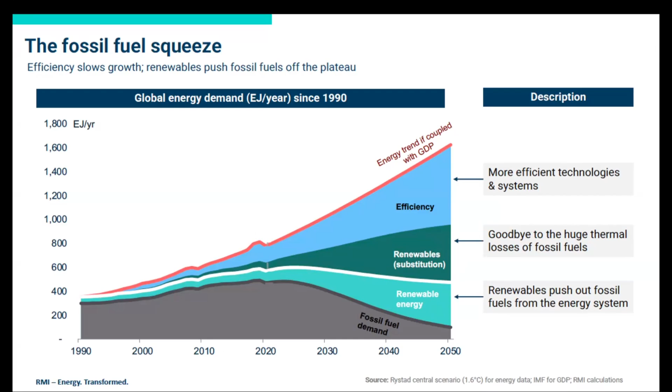In the US, every sector has already passed peak fossil fuel. In coal-intensive China and India, fossil fuel generation fell last year.

This is most obvious in Asia, which used four-fifths of the oil and gas flowing through the Strait of Hormuz and was hardest hit by its closure. So Asia is abandoning the fossil fuel growth that it was projected to drive.

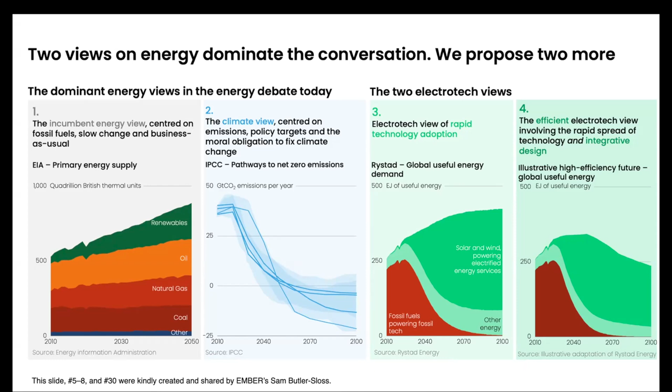Now, efficiency and renewables can meet the needs of affordable and stable prices, reliable and equitable supply, and public health and safety simultaneously for all and forever, because every 5 days the Earth receives more solar energy than the total known reserves of all fossil fuels. So capturing just a tiny fraction of that flow can meet all human needs.

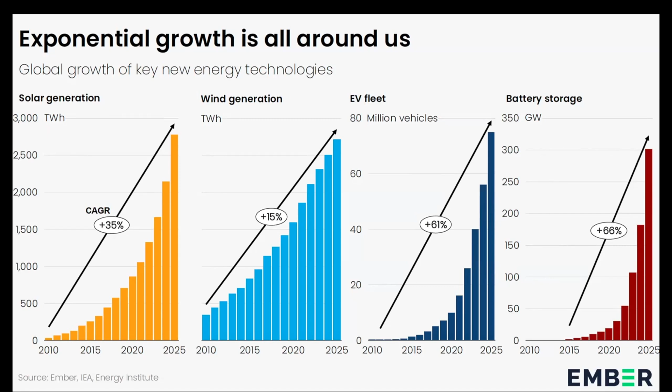Just last year, the world's solar generation grew 30%, battery storage grew 66%, 82% in China. And this new normal needs an agile mindset because it's hard to catch an exponential curve from behind.

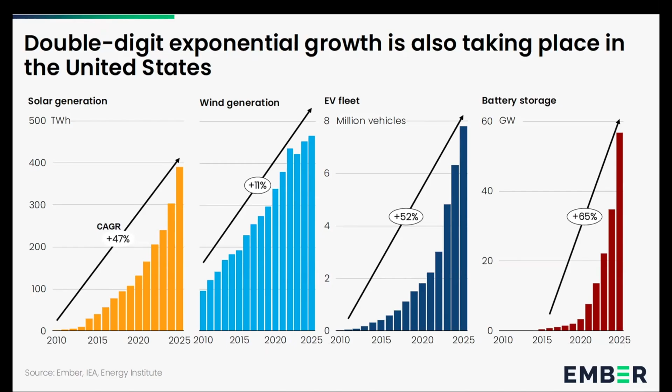Defying a federal blockade on renewables, the U.S. shares in this rapid growth, but it dominates old energy industries, not new. America is not the technological epicenter of clean energy as it was for the internet. For now, the clean energy epicenter is China, where far-sighted policies have built about half the world's renewable energy and even more of many supply chains.

The U.S. is starting to catch up, but from far behind and despite perverse national policy. Most of the world's solar power is now in emerging markets, and two-thirds of those countries are deploying it faster than the U.S. China, Europe, and others resolutely pursue consistent long-term strategies and will gladly grab any market where the U.S. falters. By 2024, China was making more money exporting green technologies than the U.S. made exporting fossil fuels. America is a petrostate, extracting about as much oil as Saudi Arabia plus Russia, while China

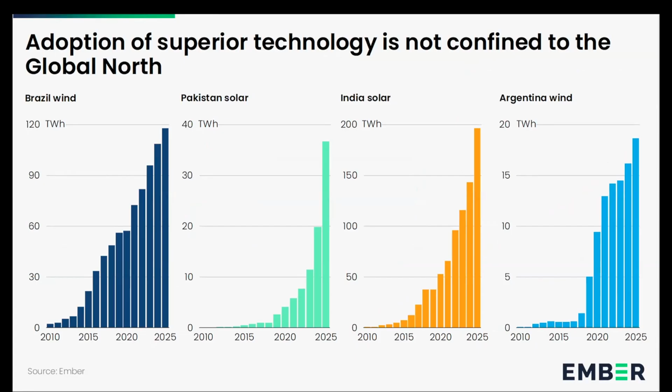races to become the first major electrostate, a sure destination. And as we'll see later, many developing countries are eagerly leapfrogging over the rest of the fossil fuel era to get reliable energy faster at low and stable prices.

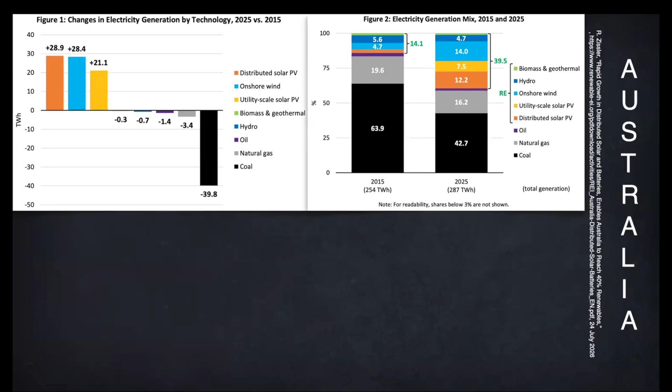Australia shows how these trends can converge. In the last decade, strong solar and wind power growth cut coal power by 2/5 in 10 years and raised the nation's renewable power share from 14% to 40%.

Rooftop solar costs most Australians just 5 US cents a kilowatt hour. That's several-fold less than grid power and several-fold less than the US rooftop solar price, even though we buy the same equipment, but they install it smarter. Batteries, and they have a lot less red tape than we do.

Batteries are booming, and in just one year in the national electricity market, which is 82% of the national total, the batteries helped cut evening peak electricity prices in half in one year by substituting midday solar power for costlier gas.

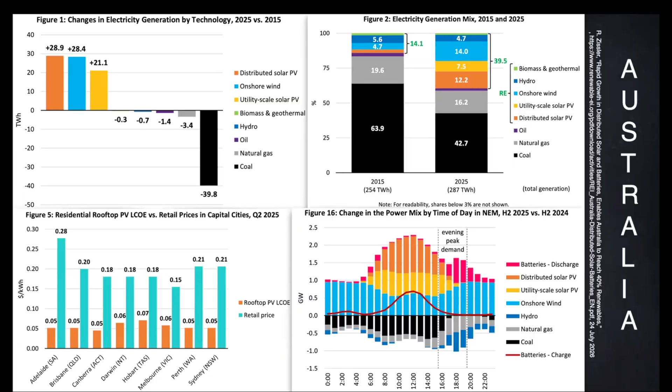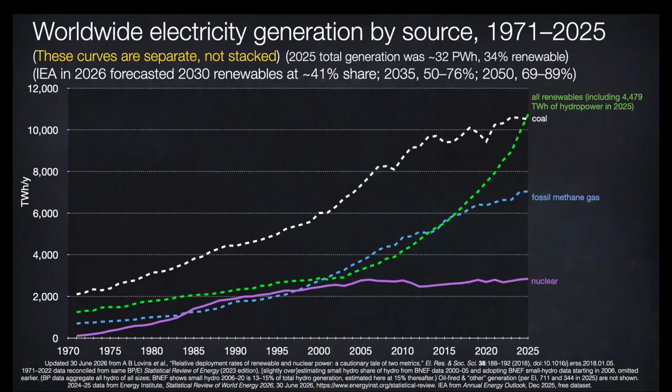Modern renewables now look set to add more generation in 5 years, maybe 4, than in the past century. And they've shifted energy economics from fuel extraction, so the more you dig, the more it costs, the less you buy, to equipment manufacturing, so the more you build, the less it costs, the more you buy. So those cost curves have crossed, triggering the green curve's exponential growth. As Tom Friedman says, the more we buy, the cheaper it gets, so we buy more, so it gets cheaper.

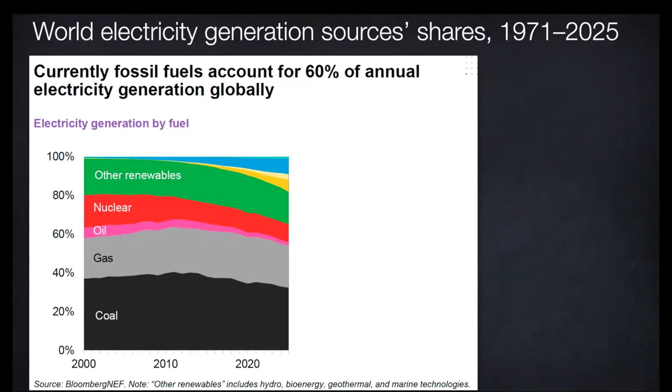Very important feedback. Thus, electricity's renewable share is set to double from 1/3 to at least 2/3 by mid-century. And the most formidable competitor is not even shown in this graph. It is efficient use that wrings more work from our energy. Bloomberg New Energy Finance, the source of this graph, leads in tracking the supply side transition, but doesn't yet comparably analyze efficient use. So they're showing a need for more supply than we probably will need.

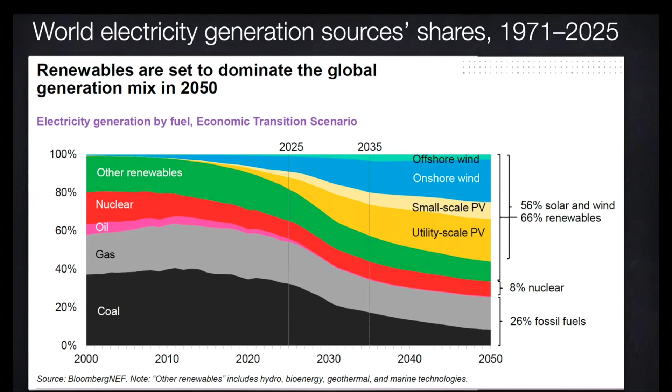Now, in the 50 years through 2025, saved energy, about 2/3 due to smarter technologies, dropped U.S. energy intensity by 65%, with immense cumulative savings. Renewables, meanwhile, tripled, but with 27 times less cumulative impact.

Who knew? Renewables get virtually all the headlines because they're visible, while efficiency is invisible, and the energy you don't use is almost unimaginable. Yet saved energy is half of the world's historic decarbonization and at least half of future decarbonization. So when we omit it, we are making the clean supply problem look twice as hard as it should be.

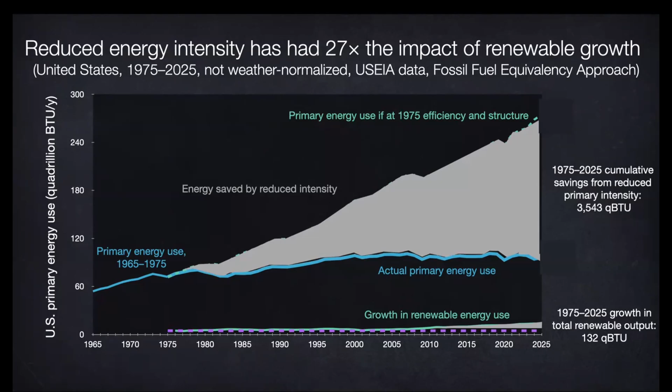Another bit of history: around 1975, U.S. government and industry all said that the total input energy needed to make a dollar of GDP could never drop. A year later, I heretically suggested it could drop 72% over the next 50 years. And as you just saw, it actually dropped 65%.

And yet, just the innovations already added by 2010 can save another threefold, twice what I originally predicted, at a third the real cost. And today that looks conservative, because optimizing buildings, vehicles, and factories as whole systems, not as piles of isolated parts, can often make very big energy savings cost less than small or no savings, turning diminishing returns into increasing returns.

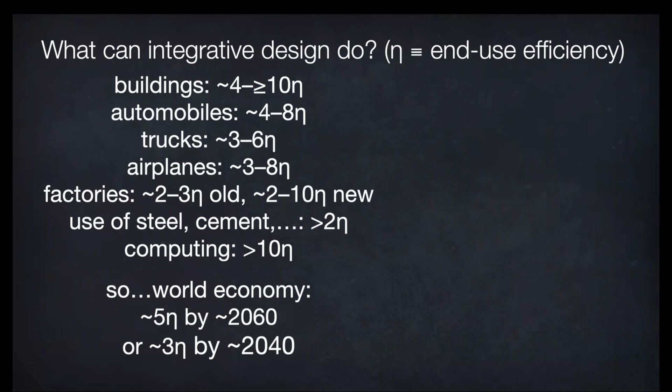Vigorously applied, such integrative design could quintuple global end-use energy productivity by about 2060, or triple it by about 2040, as documented in this foundational paper.

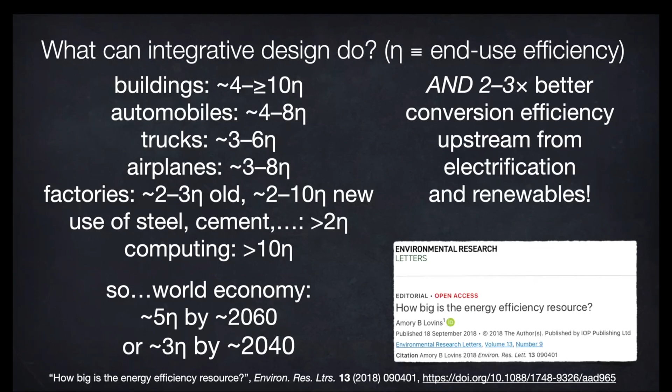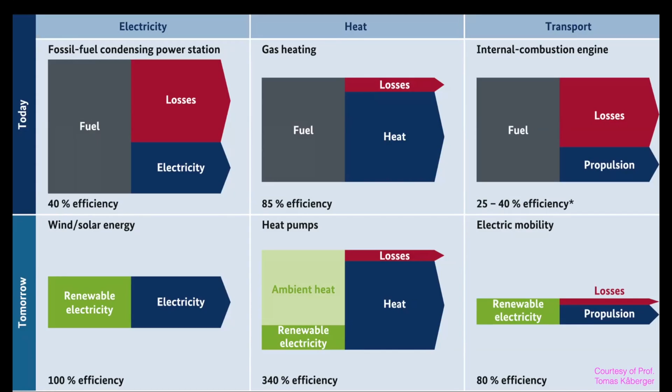And the upstream or supply-side savings of around 2 or 3-fold avoid nearly $5 trillion of global waste each year. That's almost 5% of the world economy. And yet they're only about half as important as the largely overlooked gains I'll next illustrate in end-use efficiency.

Now, the world agreed in Glasgow to double the speed of saving energy overall, and that's before including integrative design. Integrative design can make the end-use efficiency resource several-fold bigger than commonly supposed, but actually cost less because it uses not more but fewer devices and not fancier but simpler devices, more artfully chosen, combined, timed, and sequenced.

We're familiar with resources like copper ore bodies and oil reservoirs, finite and depletable assemblages of atoms. In contrast, energy efficiency resources are infinitely expandable assemblages of ideas, depleting only stupidity, a very abundant resource.

A few examples. My wife Judy and I live here, 7,100 feet up in the Rocky Mountains near Aspen, where temperatures used to dip as low as minus 47 F, minus 44 C. The central atrium you see behind me, seen here in a February snowstorm, has so far produced 84 passive solar banana crops with no heating system.

And it was cheaper to build that way because 43 years ago, the extra cost of super efficiency was less than we saved up front by leaving out the heating system. So this house helped inspire several hundred thousand European passive buildings with no heating and roughly normal construction costs.

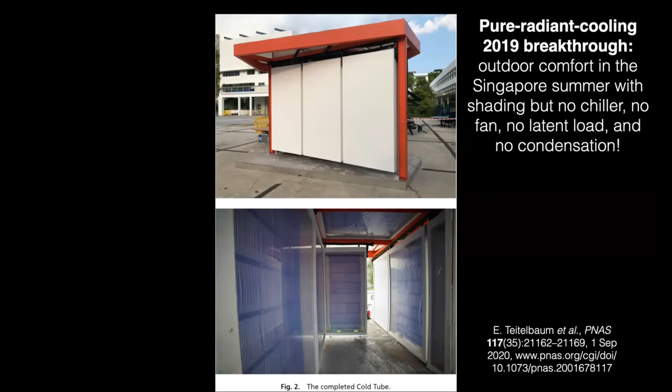There was a light 0.3 meter per second breeze. But instead, in a shaded but open-ended pavilion, people stayed cooled by radiating their bodies' far infrared rays into panels circulating slightly cooled water, shielded from the humid air by a thin plastic film.

If you cool the water to about 73 to 77°F, that can deliver comfort in air up to at least 90°F, 32°C, at 80% relative humidity. And the water can often be cooled passively with no electricity, potentially eliminating the world's long-term growth in peak electricity demand.

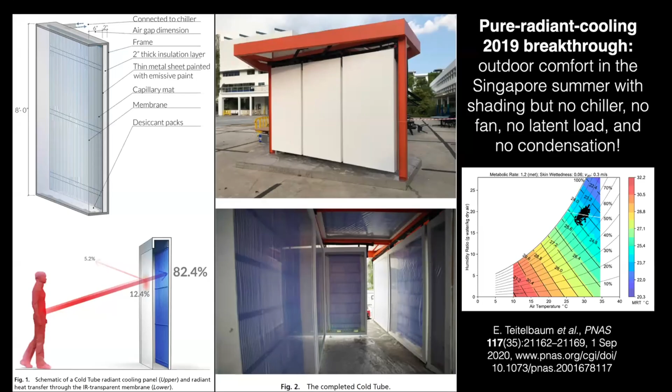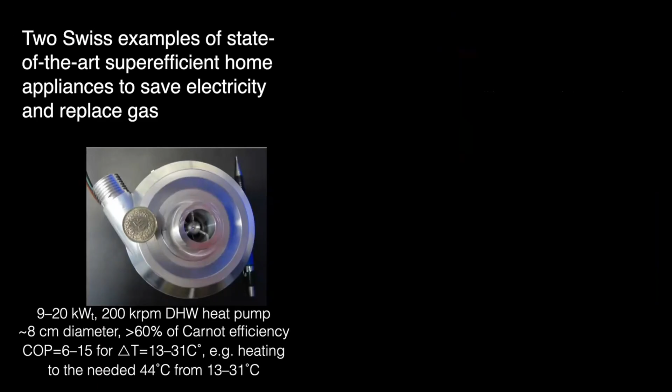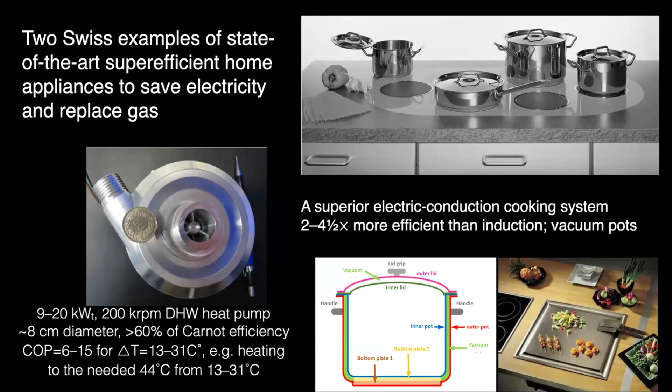Inside buildings, this fist-size heat pump can deliver 6 to 15 units of hot water per unit of electricity, while this electric conduction cooking system is 2 to 4.5 times more efficient than induction and otherwise superior, thanks partly to vacuum-insulated cookware you can get online that also works with induction cooktops. That's what we're doing now.

Industry uses half the world's energy and electricity. RMI's latest $60+ billion worth of redesigns across many kinds of industries typically found about 30 to 60% energy savings on retrofits, paying back in a few years, and far outperforming the orange zone in the upper left, where most energy service companies deliver disintegrated design.

In new industrial projects, integrative design generally yielded 40 to over 90% energy savings, with nearly always lower than normal capital costs.

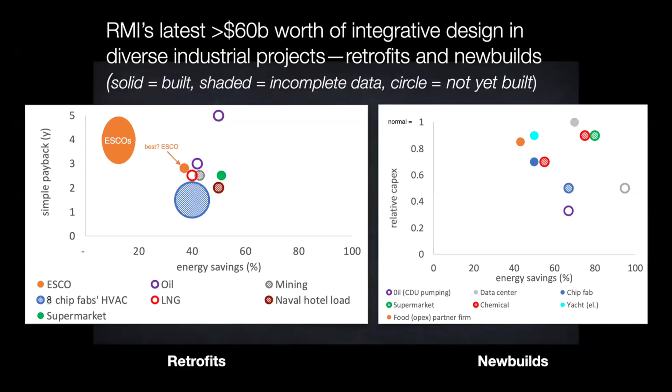For example, our redesign of this Texas Instruments semiconductor wafer fab used 40% less energy with 30% lower construction costs. So it was built in Texas, not China. By 2017, it had inspired cutting company-wide chip-making energy, normalized per chip layer, by 62%, water intensity 56%, greenhouse gas intensity 57%, and that continues.

RMI's next wafer fab design showed how to save about two-thirds of its energy use and half its capital cost, while replacing all 22,000 tons of chillers with any of 3 natural cooling methods that can yield upwards of 100 units of cooling per unit of electricity.

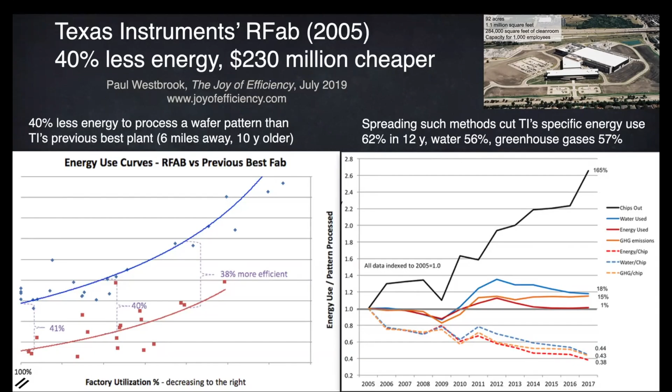But many of the biggest industrial savings come from simply moving fluids more efficiently. Half the world's electricity turns motors, and half the motor torque turns pumps and fans, moving fluids through pipes and ducts. Just better pipe and duct design can save 80 to 90+% of the friction and therefore the pumping power—97% in this building.

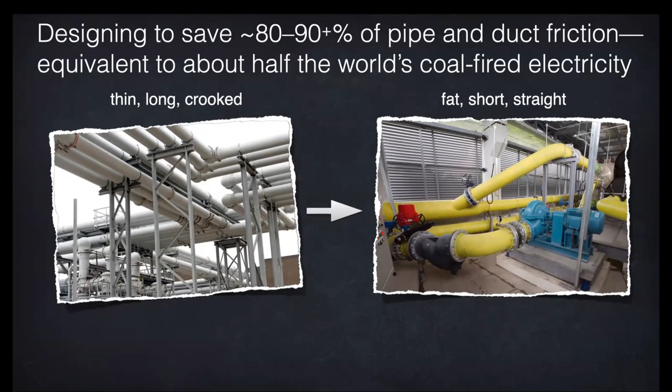So if everybody did this, it could save roughly half the world's coal-fired electricity, or a fifth of all electricity, and it would pay for itself typically in under a year in retrofit and instantly in a new build. But this isn't yet in any standard engineering textbook, official study, industry forecast, or climate model.

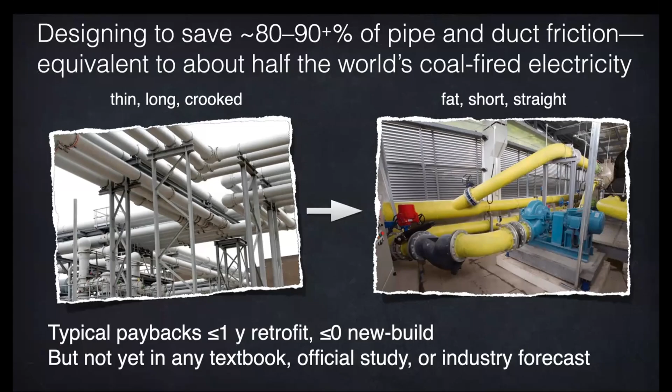Why not? Because it's not a technology, it's a design method. And few people yet think of design as a path to speed and scale. So to wring out friction, we simply use big pipes and small pumps, not small pipes and big pumps.

That's because the friction in the pipe goes down as nearly the 5th power of diameter, but the cost of the fatter pipe goes up as only about the 2nd power of diameter. Notice also we're raising up the pump on the right to meet the pipe rather than dipping the pipe down to meet a pump on the floor and then back up again.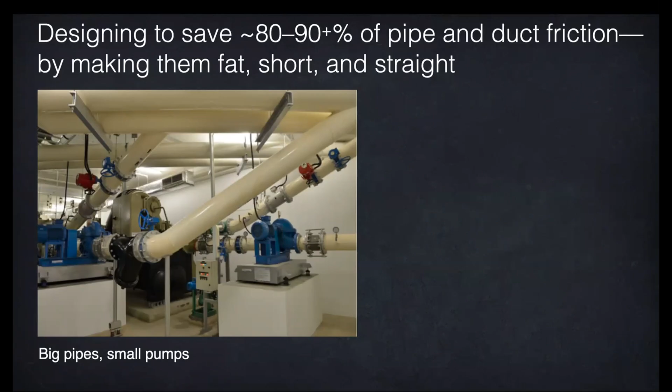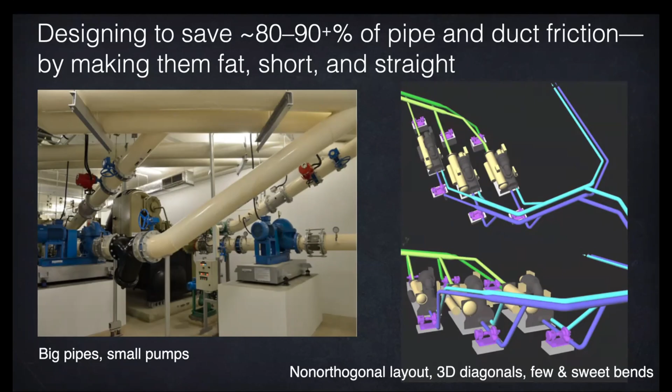That eliminates 4 elbows, right angle bends, and their friction. And then to eliminate the rest of the elbows, we lay out the pipes first, then the equipment. So those tan chillers normally in a neat row get staggered until the elbows go away. We lay out supply pipes as if they were drains. We bend minds, not pipes.

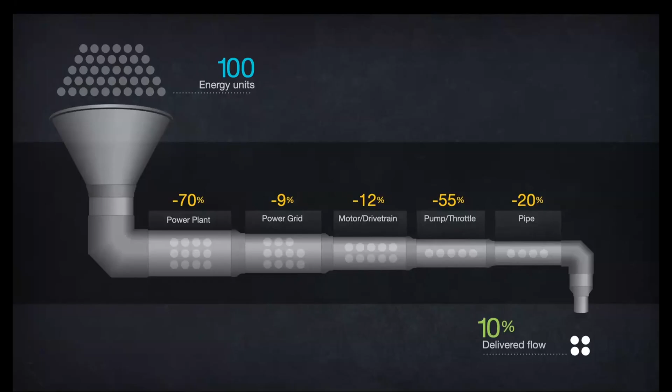Now think of the whole power and pumping system. From the fuel burned in the thermal power plant to the end use, there are many successive losses compounding. So only 1/10 of the energy in the fuel comes out the pipe as flow. But now turn those compounding losses around backwards from right to left, and they become compounding savings. Every unit of flow or friction you save in the pipe saves 10 units of fuel cost, emissions, and global weirding back at the power plant.

And as you go back upstream, the components get smaller and cheaper, so the total capital cost goes down. Next, as you're making the motor systems 5 or 10 times smaller, because there's less work to do, combine them with 35 improvements to the motor system, and you raise the potential savings from 1/5 to 1/3 of the world's electricity.

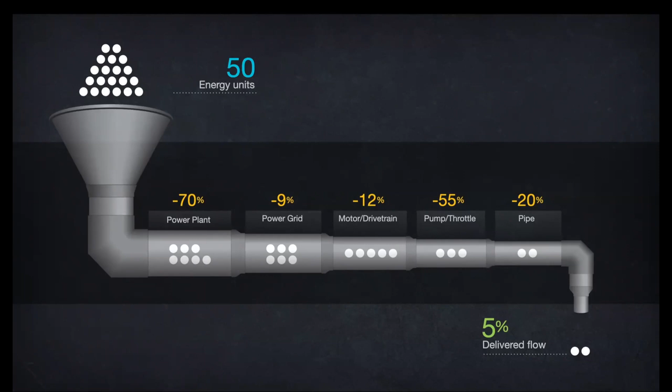That's a big opportunity to be missing from all the forecasts and climate models. Big white space. Now let's apply the same logic to big old data centers. 2/3 of the fuel fed into the power plant is lost in the plant and a bit in the grid. Half the metered electricity is then lost in the cooling system and the uninterruptible power supplies, together half the total capital cost, before reaching the servers.

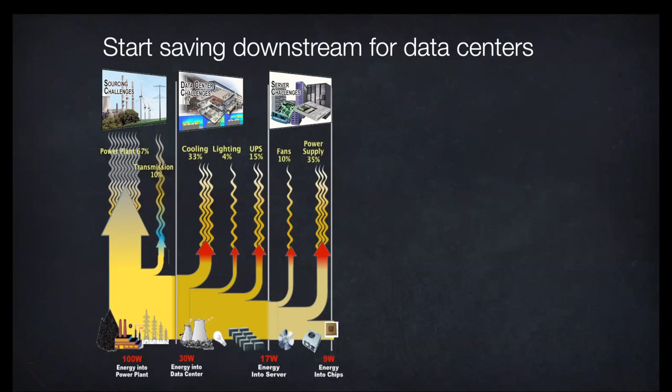Then half the server energy doesn't reach the chips because it's lost in inefficient, usually very underloaded power supplies and lots of superfluous fans. Next comes severe underutilization of computing resources, partly through insufficient virtualization. So they used to have, and some still do, 1 physical server per app. The resulting energy flow down at the bottom right is about to vanish, so let's magnify it first.

So next comes bloatware, running many unnecessary threads and processes and making simple tasks very complex because compute cycles were cheaper than programmers' attention and someone else was buying the electricity. Downstream of all that, you may even have inefficient business processes. In all, the red numbers at the bottom reveal that just a few 100,000ths of the original fuel energy is actually producing customer value. Where should we start fixing this?

Downstream, just like in pumping, start at the end. First, write elegantly terse code, optimally compiled, with the goal that every compute cycle is a needed and wanted one. I'd assume this would save an order of magnitude, a factor 10 in compute cycles, but recent tests suggest it's 2 orders of magnitude, or maybe a lot more. And the shift to mobile devices now makes efficient code valuably stretch battery life.

Next step, at least quadruple server efficiency. Now we can do even more. And the servers will then need a lot less cooling and power supply, both of which can be done in smarter ways. And we could even save half the utility losses by using fuel cell trigeneration, cheaper than the UPSs it displaces. Well, multiply these savings from downstream to upstream, and you cut the energy use by at least 2 orders of magnitude.

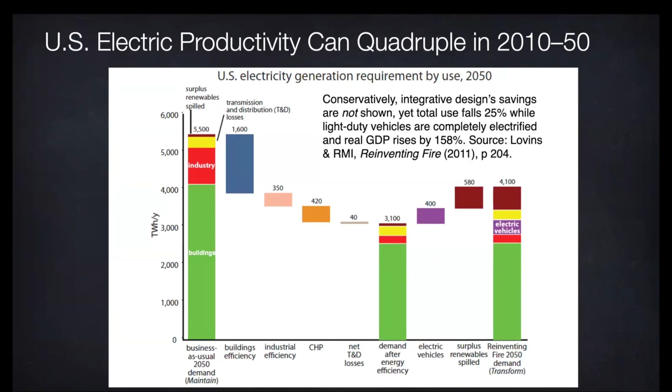And then there are a lot more layers of, say, industrial efficiency. Heavy industry can use radically better processes like making ultra-pure iron from ferrous dirt. It doesn't even have to be ore, at the temperature of a cup of hot coffee by using electrochemistry instead of pyrometallurgy. But also, smarter structural design and new business models can profitably save at least half the world's cement and steel that now release 15% of global CO2.

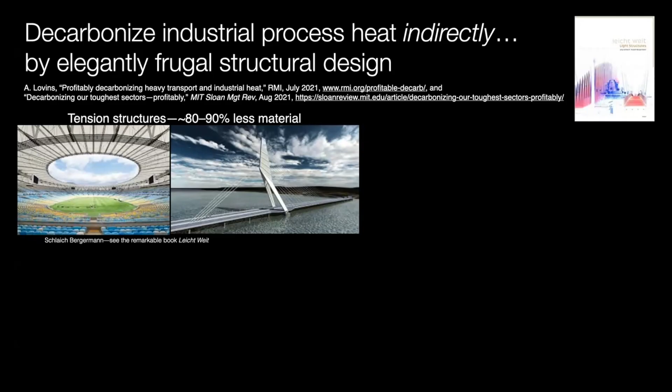Careful specification and application of concrete can save another twofold, together saving 3/4 before adopting lower carbon materials or production processes. Let me give you some examples of the efficient structural design. Substituting tension for compression structures typically looks better, costs less, and uses about 1/8 as many tons. Pouring concrete into curvy fabric forms, not rigid prismatic forms, can often save over half the concrete by putting strength and stiffness only where you need them, and then the weight savings compound because you need less strength to hold up less weight.

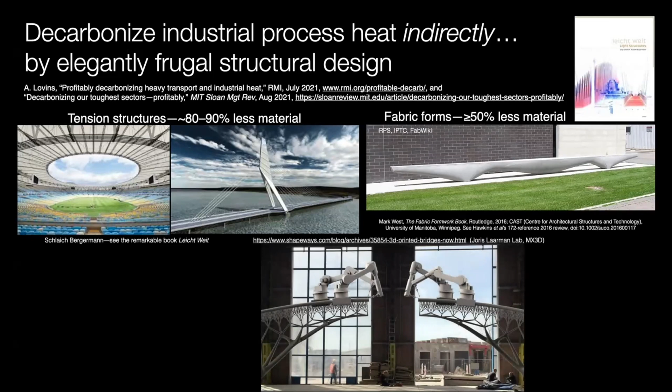An airy 3D printed bridge can carry mainly its users, while massive concrete bridges support mainly their own weight. And this stainless steel bridge, by the way, was 3D printed. Most importantly, floor slabs like this one total about half the weight of a typical mid or high-rise building. A 2-inch thick folded concrete floor slab like this, or a shallow vaulted dome, can replace a 12-inch thick slab, cost less, and save 3/4 of the cement and all of the steel.

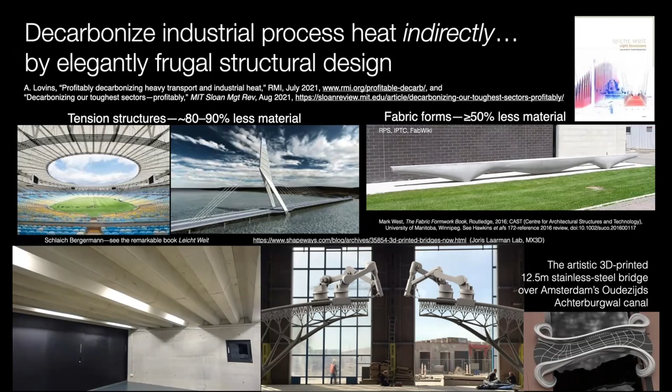How? Well, designing out, as you see at the left, a vertical meter of mechanical plenum at each story fits 3 stories with normal 9-foot 2-inch ceiling height, 2.8 meters, into the current height of 2 stories. Cost, complexity, and time fall dramatically. Why would you build any other way? And cement is just the start.

Our 1999 book with Paul Hawken, Natural Capitalism, found that the U.S. economy's flow of materials is over 99.9% pure waste, perhaps the biggest business bonanza on the planet. What about mobility? Well, the world is buying nearly $1 trillion worth of EVs this year, led by oil import-dependent Asia. Electrification roughly triples a car's efficiency, but first improving the vehicle itself can cut by 2- or 3-fold the energy needed to move it.

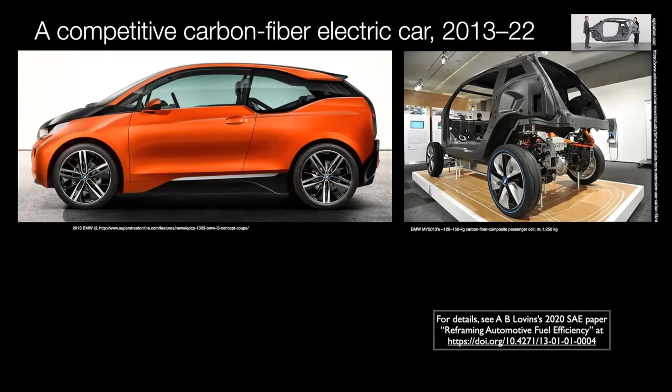You see, 2/3 of that energy is caused by the car's weight. And BMW showed how integrative design can lightweight a car at competitive cost. This i3 that I drive weighed about 660 pounds less than normal, but it made money from the first unit off the assembly line and then for 250,000 more. Because the carbon fiber that saves that 300 kilograms is paid for by the batteries that its lightness saves.

Batteries are the costliest component of the EV. And of course, fewer batteries also mean faster recharging with less electricity, infrastructure, emissions, and investment. EPRI found that such savings from doubling the efficiency of autos before electrifying them could save the US about $200 billion a year. Now, this car's integrative design snowballs weight savings far more than usually assumed.

Its manufacturing is radically frugal, eliminating the two hardest and costliest steps in automaking. It's much better for workers. So the efficiency is quadrupled to the equivalent of 124 miles a gallon without compromise, and with many driver advantages, of which my favorite is half normal turn radius.

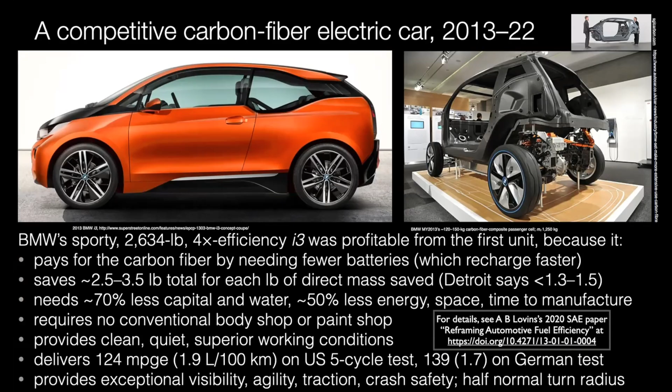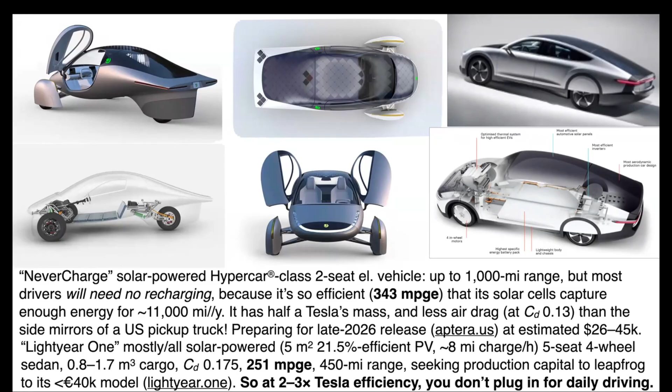Now, the next game changer could be a couple of hypercars from small firms I've advised, both production ready. The first one from Aptera in San Diego is headed for production in the next few quarters. And most drivers will not need to recharge this carbon fiber 2-seat three-wheeler or this Dutch metal 5-seat four-wheeler because they're about 3 times as efficient as a Tesla. So their topside solar cells capture enough energy for ordinary daily driving without plugging in, bypassing the infrastructure for charging and its electricity supplies.

But cars are just the start. Using the same automotive components, Tesla's battery electric heavy truck has been ramping up mass production since April, and it can triple to sextuple the efficiency we now get from the 18-wheeler diesel fleet, and with great economics. Then there's this thoroughly flight-tested air taxi that could fly nonstop from Denver to London with 1/8 the fuel use of a typical business jet.

A mid-size hydrogen model has been announced, plus importantly, a transonic business jet for 2030 service with doubled efficiency and cabin size. The superlaminar aerodynamics in these planes can scale to probably 737 size, and it could blow up aviation's business models. So sustainable aviation fuel, the industry's current focus, can be overtaken by all-electric aircraft.

Now, ancient flying reptiles with tough but paper-thin bones had a wingspan up to 10 or 11 meters. That's 3 times as big as our biggest birds that fly today. But now their fossils can inspire fossil-free flight. A couple of years ago, a quiet 5-passenger battery electric plane flew about a 600-pound payload for 386 statute miles. It's kind of like San Diego to San Jose. Using no runway, it takes off and lands vertically from a backyard or driveway or roof.

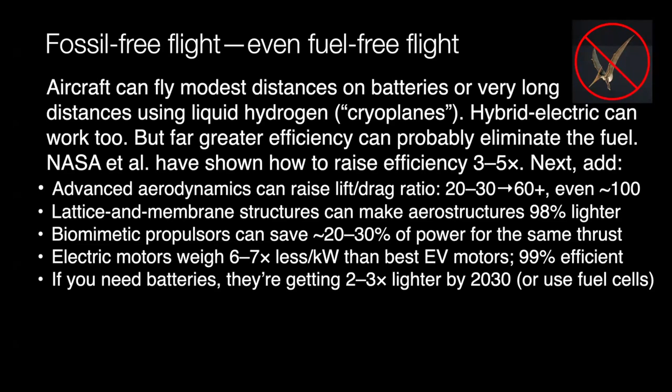But if you fly in daylight, as many missions do, you may need very little storage if you put ultralight solar cells on the aircraft's upper and lower surfaces, since it gets nearly as much light reflected from below as from the sun above. High altitude sun is 20 or 25% stronger, and cold makes the cells more efficient.

Now, Airbus has commercialized a solar aircraft that can stay aloft for months. Some military solar platforms stay up indefinitely. A solar aircraft took a pilot into the stratosphere a quarter century ago, and others flown around the Earth, and you can buy a two-seat version today.

Moreover, today's standard solar cells are about 23% efficient. The best are 37%. Optical antennas approaching 80% wouldn't violate the laws of physics. So like the Aptera car you saw 3 slides ago, we could probably make an aircraft efficient enough to propel just with solar energy captured on its surfaces.

Now, electric flight could also have winning economics for 3 reasons. The electric planes cost less to buy and far less to run. Electricity is about as much cheaper than fuel as batteries are heavier than fuel. And every decade after you buy a battery electric plane, you can probably upgrade its batteries to double its range and therefore quadruple its served cities. So it adds ever more value, unlike fuel planes, which only shed value with age.

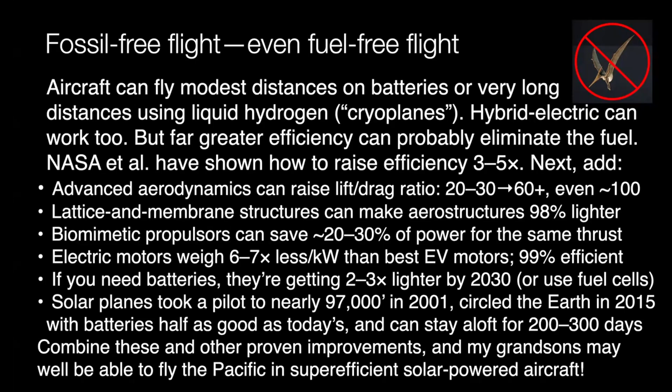So put this whole story together, as I do in an annual Stanford lecture, and I suspect my grandsons may be able to fly the Pacific on solar-powered aircraft. That many aviation industry leaders loved when I proposed it to a couple of their major conferences in 2019.

You see, for over a decade, says NASA, we've had the technology to create 3 to 5-fold more efficient planes if someone would make them and someone would buy them. Now we can see even greater gains. But why take a century to do this incrementally as now, when we can leapfrog straight to it?

Trouble is that major airplane buyers, even if they have the capital, are understandably risk averse. Airframe makers don't want to risk huge development investments for a radically better product that might not sell. So incrementalism continues as we squander fuel, money, carbon budget, and precious time. Climate won't wait. Business as usual ultimately won't work. Aviation's license to operate will erode. Our shareholders, voters, and children will judge us negligent.

But what if a powerful consortium of major customers, airlines, lessors, delivery and air logistics firms, the Pentagon, relieve the airframe makers' market risk so they could fully focus their skills and ambitions? The buyers could collectively solicit a super efficient airplane by publishing very demanding specs, very clean and at least quadrupled efficiency, and collectively commit to buy X copies a year for Y years at price Z from whomever first brings it to market, with a consolation prize for the runner-up.

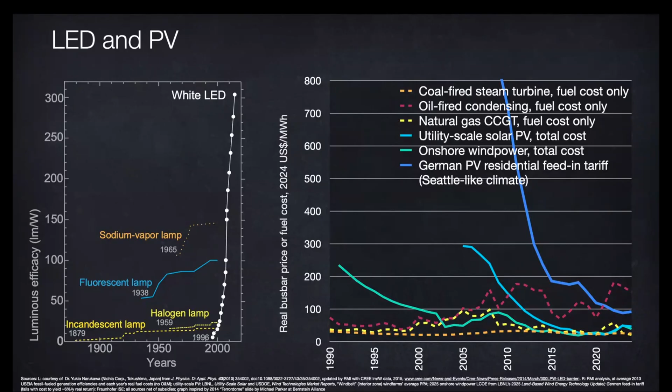But the revolution goes a lot deeper than that. We're shifting from molecules and atoms to bits and packets, from hardware to software, from hierarchies to networks. Electricity is changing from centralized, supply-focused, fossil and uranium-fueled and brittle to distributed, customer-focused, renewable, and resilient.

And its deepest change is how the information age informs, enables, and organizes customers to take power into their own hands. It's wise to sell customers what they want before someone else does. Customers are figuring out that they can buy a lot fewer electrons, use them more productively and more timely, produce their own, even trade them with each other.

Indeed, powerful disruptors are now converging on the electricity industry from at least 8 directions. These 8 Pac-Men of the apocalypse move fast. They don't just add, they exponentiate. They're not lone wolves, they hunt in packs. They multiply quickly, and they can gobble half of utility revenues in this decade. Together, they're creating an alien competitive landscape faster than most utility cultures can cope.

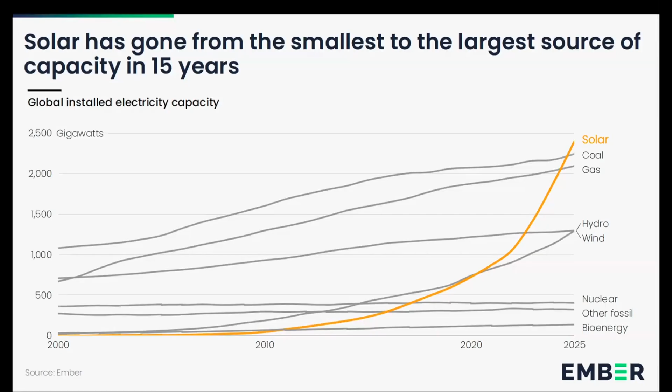Solar power has now eclipsed every other kind of global generating capacity, largely because, like wind power, it's fundamentally cheaper and faster than fossil or nuclear. The IEA estimated that 3 years ago, 96% of new solar and onshore wind power was cheaper than new coal or gas power, and about 3/4 of solar and wind would beat existing fossil fuel plants.

Last year, Bloomberg estimated renewables won for about 4/5 of total electricity generation and beat just the cost of coal or gas in existing plants in 1/4 of the global economy. Bloomberg also confirmed that the cheapest way to meet a flat load is now solar or wind plus backup, which can be demand side or storage or renewable or fueled.

Costs remain about flat for fossil power, rising for nuclear, but they keep broadly falling, trending down for renewables and especially for storage. Batteries now get more investment and add more capacity than nuclear, and they're doubling every couple of years. Batteries convert solar or wind from when you have it to when you want it, so they have eliminated the supposed need for continuous power from thermal plants.

Therefore, the clean firm argument has gone away because of cheap batteries, and you can't even make a business case for anything with a steam cycle, because even if the heat is free, the other parts, the steam cycle, cost too much.

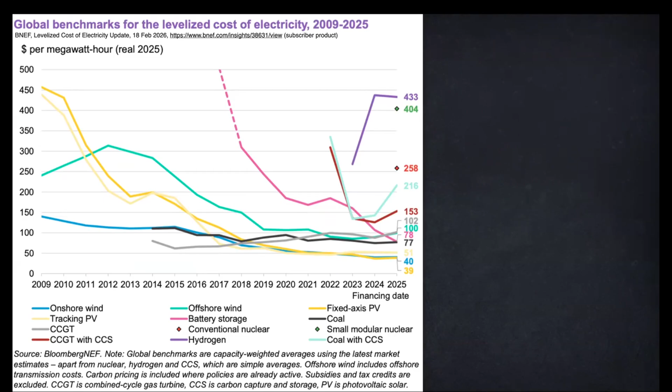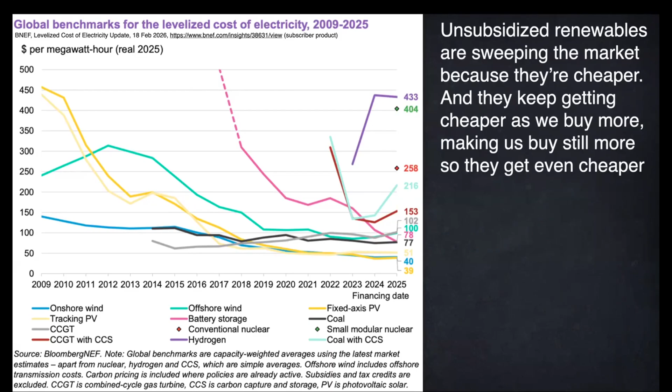Now, this familiar Bloomberg history of levelized wholesale electricity costs, similar to IRENA's global database, shows why unsubsidized renewables win and keep pulling ahead. It's about feedback. And adding grid integration costs for all the technologies shown would actually tend to widen renewables' cost advantage, because thermal plants tend to have bigger, longer, more abrupt, and far less predictable forced outages than solar and wind power do. Therefore, the fossil or nuclear plants need more and costlier backup for the same reliability.

To be sure, solar, wind, and storage, totaling a fourth more than total U.S. generating capacity, are still stuck for an average of 5 years in queues awaiting interconnections, or a decade awaiting approvals for a new transmission right-of-way. And over half that much proposed capacity has already been withdrawn.

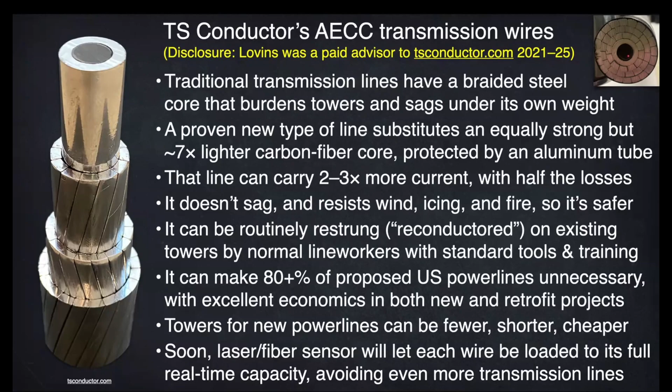You can't afford to wait, but new power lines can often be displaced by efficiency, timely use, and distributed resources, or by advanced transmission wires. A new kind of conductor from a company I advised till last fall can carry 2 or 3 times the current of traditional steel core aluminum conductors with half the losses, superior safety and reliability, and excellent economics. This novel conductor is an important way to decongest many regional grids for rapid renewable expansion by reconductoring existing towers using standard tools, equipment, and training.

And this can often avoid a new right-of-way with vastly lower cost, risk, and time. In fact, an older but less capable type of advanced conductor carrying only twice the current, not 2 or 3 times and soon 4, could nearly quadruple the U.S. transmission that's addable by 2035. And this could meet over 80% of the interzonal transmission needs to exceed 90% renewable electricity. This better new technology should avoid even more. So for bottlenecked renewables and congested grids, help is on the way.

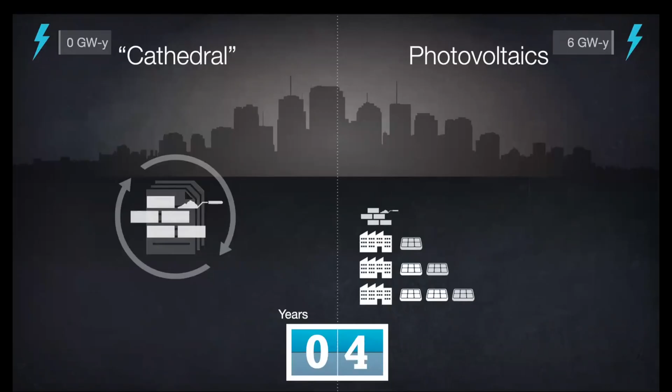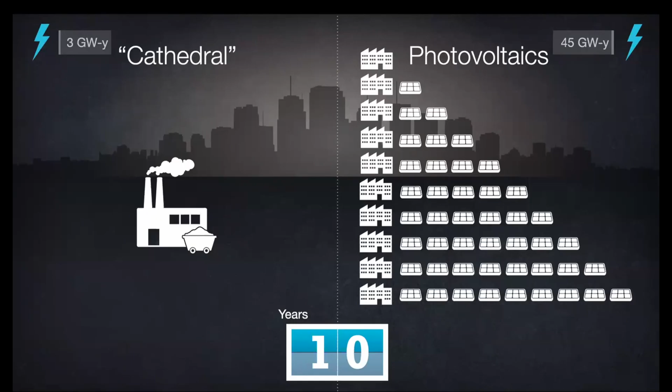Renewables also scale up in a fundamentally different way. Traditionally, we would build giant cathedral-like power plants costing billions, taking many years to license and build. But now each year, with about comparable capital, you can build a factory that produces each year thereafter enough solar cells to generate each year thereafter as much electricity as your cathedral ultimately will. So solar output worldwide has scaled faster than cell phones. Big, slow, complex power plants can't catch up. And over 90% of the world's and America's net capacity additions are now renewable.

And they can move incredibly quickly. For example, at the end of 2018, coal-dependent Vietnam had a tenth of a gigawatt of solar power. 2 years later, it was 16.5 gigawatts. 9 of that was on 100,000 rooftops or similar structures. It was equivalent to building half the nation's coal plants in a year once the grid catches up. And by the way, 72% of those additions were installed just in the month of December, mostly in the last week of December. I don't think they got much sleep before a 9-month window closed for a juicy feed-in tariff. So by 2023, Vietnam had over 21 gigawatts of renewables, nearly all privately financed. Those communists are impressive capitalists.

Similarly, grassroots Pakistanis raised solar power from 3 to 22% of total electricity in 4 years, saving over $18 billion in oil and gas imports and canceling 21 unneeded LNG cargoes. Pakistan, skeptical about renewables in 2019, now targets 95% domestic clean electricity by 2040.

China has a whole county rooftop solar program that does centralized auction and batch installation across the rooftops of an entire region. In 2017, in China, rooftop PVs were not a thing. 5 years later, they were 40% of total and 61% of new Chinese solar power. 1 of every 4 solar panels in the world was on a Chinese roof. Globally, in 2023, distributed solar got as much investment as utility scale solar. It continues to soar. And in the US, it's been cheaper than grid power since 2020, and Japan since 2014.

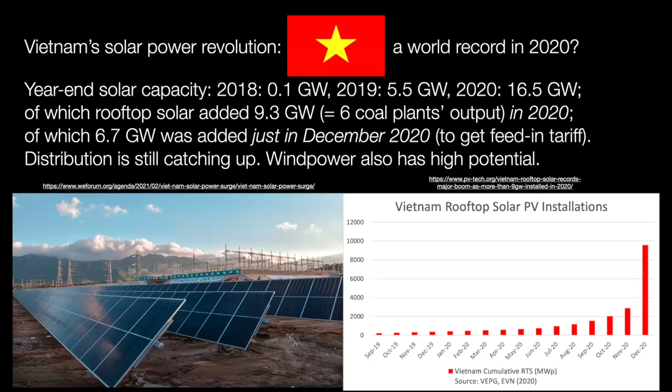Now, this all means we don't need speculative, slow, costly technologies like nuclear fusion and fission, except, of course, the well-engineered and remotely sited free fusion reactor already thoughtfully provided.

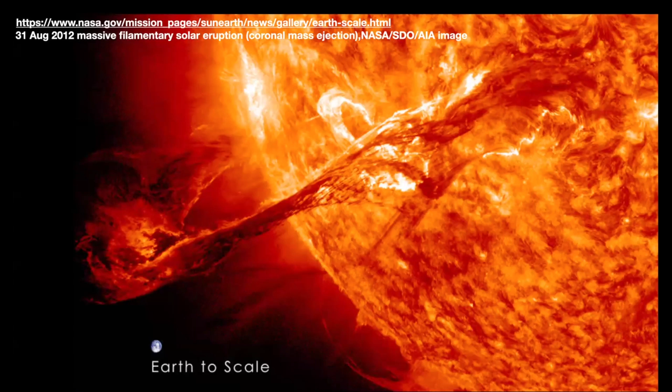However, I'm glad our neighborhood fusion reactor is 93 million miles away because it occasionally burps, and such solar flares will sooner or later destroy any unprotected power grid, as many still are.

Against all these threats and more, our best protection is a portfolio of efficiently used, diverse, dispersed, renewable, resilient power supplies, the right size for the task, especially right on our roofs, not at the other end of a vast and brittle grid, and wired to work with or without that grid, as my house does. That resilient hookup should be our standard practice and a crucial element of national security, built one rooftop at a time. And all our filling stations for motor fuel should get solar power and batteries so we can fuel old-fashioned vehicles even if the grid fails.

Now, carbon-free power is necessary but not sufficient. We also need cheap and fast. So we need to count carbon and cost and speed. At actual market prices and deployment speeds, new nuclear plants would save many-fold less carbon per dollar and per year than cheaper, faster efficiency or modern renewables. And the US grid will already be decarbonized by then anyway. So just operating, let alone further subsidizing existing nuclear plants, wastes money that could buy cheaper options, saving even more carbon.

The more urgent you think climate change is, the more vital it is to buy cheap, fast, proven solutions, not costly, slow, speculative ones. So when someone tells you climate change is so urgent that we need all of the above, remember Peter Bradford's reply. He said, "We're not picking and backing winners. They don't need it. We're picking and backing losers." That makes climate change worse.

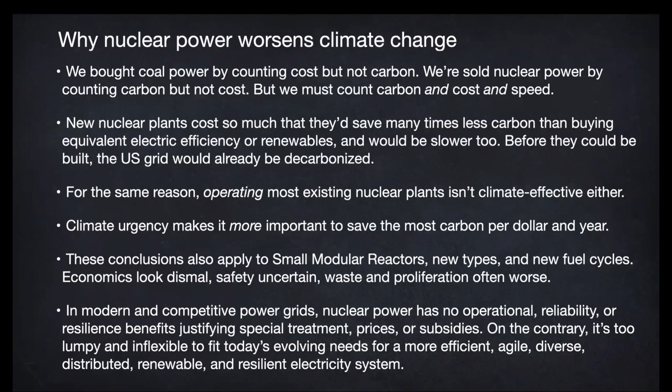Now, Mike Barnard just analyzed a natural experiment China's been doing, comparing nuclear with wind plus solar deployment. And of course, China is the world's biggest installer of wind and solar and nuclear. So using local capacity factors, the nuclear capacity China added last year will produce only 2% as much electricity as the solar and wind capacity China added last year. Both these sets of technologies have every advantage they could possibly need. They don't suffer from any of the factors normally blamed for nuclear distress elsewhere, but they scale very differently. And the wind and solar are 2 or 3 times cheaper. So 50-fold faster addition of electricity.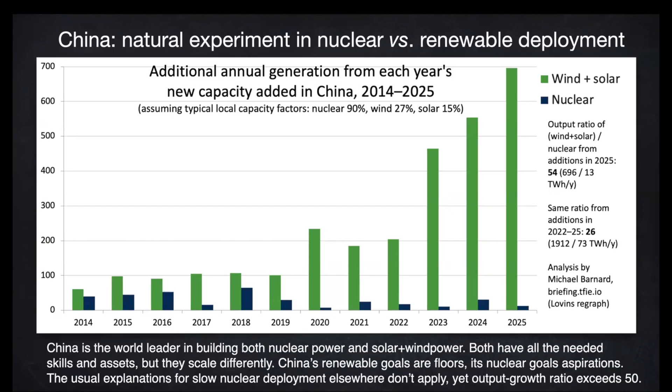And no wonder in the first half of this year, for the first time, less than half of China's electricity was coal-fired.

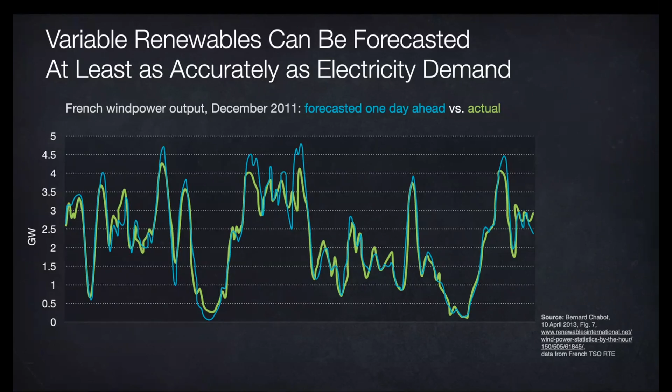Yeah, we're still told that only coal, gas, and nuclear can keep the lights on because they're 24/7, while wind and solar are variable and hence unreliable. But variable doesn't mean unpredictable. Here's how accurately the French grid operator in a stormy winter month a decade ago forecast a day ahead the output of the country's wind farms. They would do well to forecast demand that accurately. And forecasting has since improved so much that the Danish wind operators bid day ahead wind power into the hourly auction just as confidently as fossil fuel generators, but a lot more profitably.

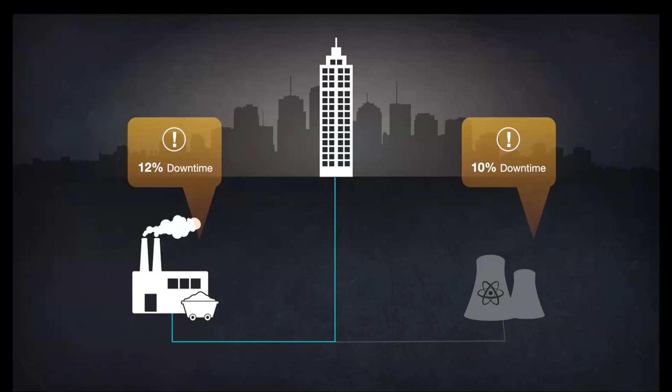Indeed, we built the grid because no generator is 24/7. They all break. And when a giant plant fails, losing a gigawatt in milliseconds, often abruptly for weeks or months, grids manage this intermittence by backing up failed plants with working plants. And in exactly the same way, but often at lower cost, grids can manage the forecastable variations of solar and wind by backing up those variable renewables with a portfolio of other renewables, all forecasted, integrated, and diversified by type and location.

So in hot and often humid Texas, with a 99% isolated grid and no big hydro, a 2050 summer week of expected loads can get much smaller and less peaky with profitably efficient use. Then we can make 86% of the annual electricity with wind and PVs and 14% from dispatchable renewables.

This 100% renewable supply can then match the load by putting the surplus electricity into two kinds of distributed storage worth buying anyway: ice-storage air conditioning, and smart bidirectional charging of EVs, and then recovering that energy when needed and filling the last gaps with unobtrusively flexible demand. That yields 100% renewable power every hour of the year with no bulk storage and with only about 5% left over to decarbonize other sectors. So the economics would be excellent even at today's prices.

No instrument plays all the time, but the ensemble continuously makes beautiful music.

An even more interesting example than Denmark is South Australia, a 3 gigawatt grid making three-fourths of its annual electricity from solar and wind, and expecting 100% next year. Now 37 big companies want to build factories there, because renewables can do our hardest tasks.

That's why solar and wind will chiefly power Australia's newest aluminum smelter and copper mine using renewable baseload contracts. It's why their iron region is shifting to robotic solar field installation and self-lifting wind turbines that go up in a day. Colorado has a steel mill over 90% solar powered. Apple has run a bunch of data centers on renewables for over a decade.

The Pentagon prefers renewables to power its most critical missions. Despite such empirical examples, standard models say we need giant fossil or nuclear plants to keep the grid reliable as it gets more renewable. But their error is omitting most of the grid balancing solutions. The full competitive landscape includes 10 carbon-free ways, conceptually sketched here, to balance the grid across all timescales, not just big batteries in magenta and without needing fossil backup in red. Your actual cost will vary, but bulk storage comes last, not first.

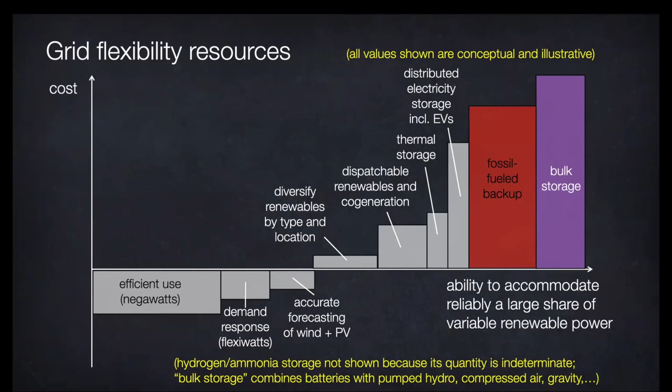And that could come just from existing gas capacity burning green molecules like hydrogen or ammonia, made at other times from surplus solar and wind. So the long-assumed need for massive long-duration storage was not found, partly because this study included only 4 of our 10 grid balancing resources.

To end, mindful markets are our most powerful tool for speeding the energy transformation, and markets can flip with breathtaking speed. On Fifth Avenue in New York in 1900, you have to look hard for the first car. 13 years later, you have to look harder for the last horse.

The horse and buggy industry thought it would have many decades to adapt, but Ford's Model T got 62% cheaper in 13 years. Car-owning households soared from 8 to about 60% in a decade, three-quarters financed by a GM and DuPont innovation called car loans.

Well, today our solar modules just got 80% cheaper in 5 years, 96% since 2010. Three-quarters of our rooftop solar is innovatively financed, and Ford's and Edison's industries are merging to eat Rockefeller's industry.